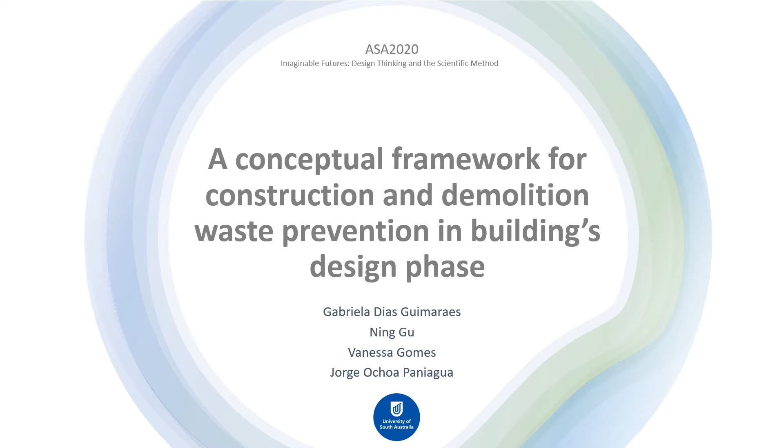I'm a PhD student at the University of South Australia, and I'm going to be presenting to you my paper entitled A Conceptual Framework for Construction and Demolition Waste Prevention in Buildings Design Phase.

When it comes to sustainability in the building sector, beyond the GHG emissions and energy use, waste started to gain global attention, especially since without any consideration, this type of waste can have a significant impact on both the economy and environment, and can represent almost 40% of a country's total waste. So the effects of construction and demolition waste are definitely noteworthy, and the need for a proper management strategy becomes clear.

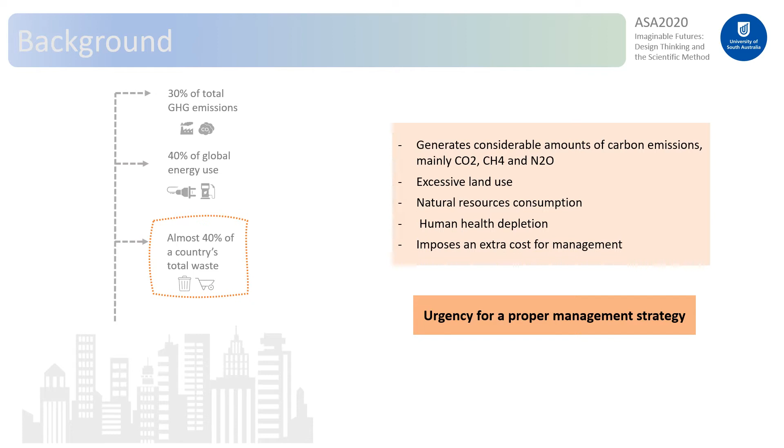The environmental evaluation of processes related to construction and demolition waste can be analyzed through the waste hierarchy triangle, basically a tool that indicates preferable solutions to reduce and manage solid waste. As shown in the diagram, the concept of avoiding waste is preferable, since it offers preventive measures. Particularly for buildings, the best way to apply this perception is during the design phase, where there is a higher chance of optimizing project alternatives for waste efficiency.

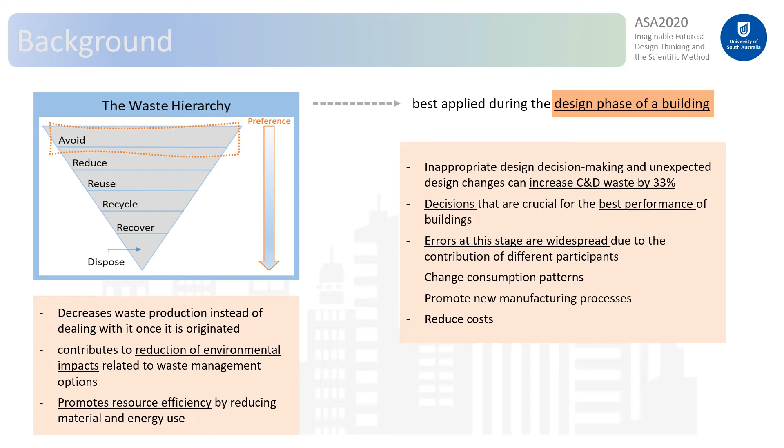With that in mind, waste prevention needs to consider impact from a life cycle approach, so that waste streams are comprehensively analyzed and accurately dealt with during the design phase. It also calls for a focus on human factors, as its attitude, reality, context, and necessities will orientate this development. In addition to that, the amount of data and the requirement of computational integration expect the combination of technological base as well.

Therefore, the combination of BIM and LCA is seen in the literature as an important step towards waste minimization during the early stages of a building, because of one's potential to store and manage essential information and share it with multiple stakeholders, and the other's holistic environmental assessment.

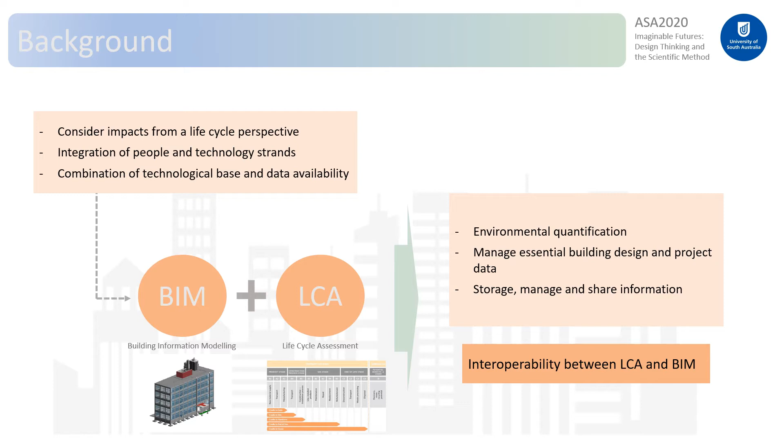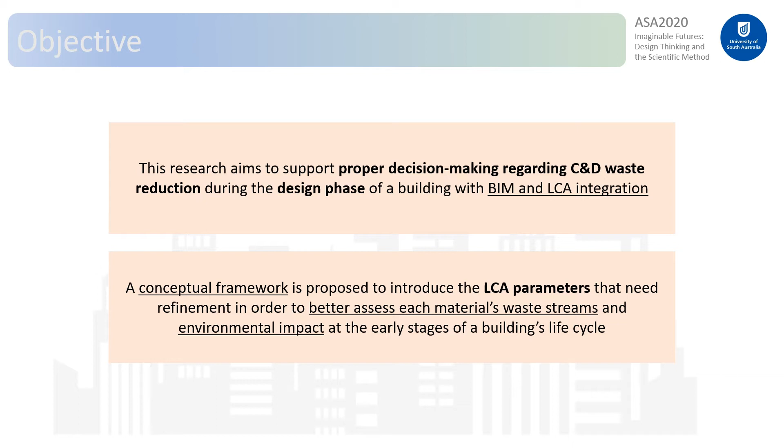But although currently widespread as a suitable approach, the interoperability between BIM and LCA still faces many challenges from both a technical and informational view. For this reason, this paper aims to support proper decision-making regarding construction and demolition waste during the design phase of a building. A conceptual framework is proposed to introduce the LCA parameters that need refinement in order to better assess each material's waste stream and environmental impact at the early stages of a building's life cycle.

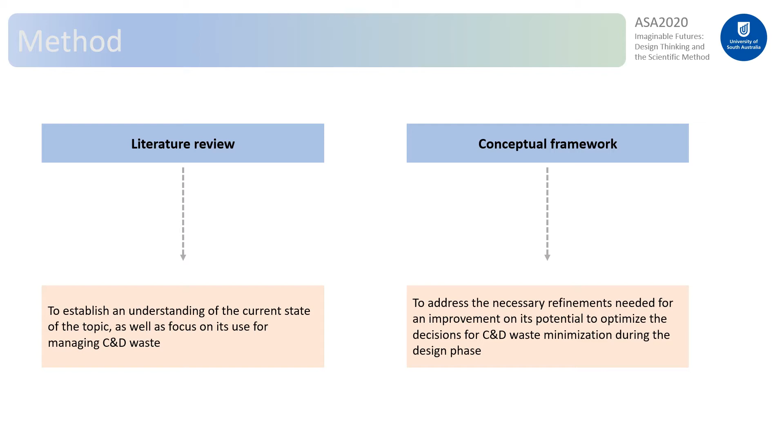To do so, a literature search on review papers discussing BIM and LCA integration has been carried out, and afterwards, a conceptual framework was introduced to address the necessary refinements needed for a construction and demolition waste management.

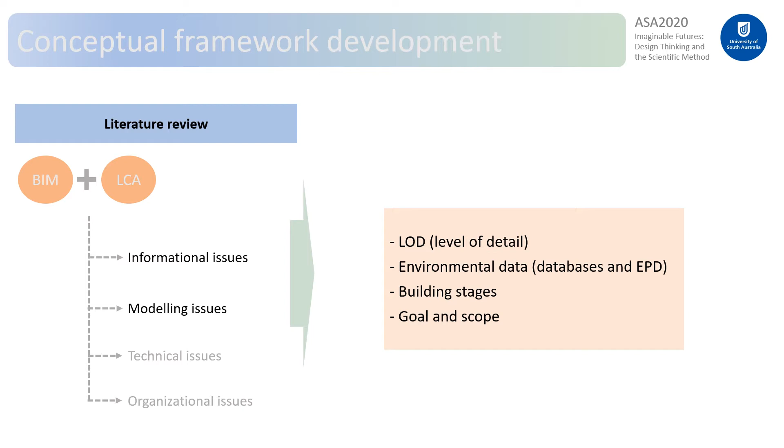After a comprehensive review of the papers, the overall challenges of BIM and LCA integration were better identified through different viewpoints, mainly divided in informational, modeling, technical, and organizational issues. Technical and organizational issues, although crucial for the proper integration and automation of the link between BIM and LCA, are not the focus of this paper, which targets the information management and modeling refinement. The biggest information and modeling issues are related to level of detail, environmental data, building stages, and goal and scope. Or better yet, the absence of this information in current assessments.

The appropriate LOD must be taken into account, as it will define the amount and quality of data that will be provided to the lifecycle inventory. Beyond that, it can actually help the calculation of end-of-life impact, as a higher LOD gives precise information on materials that can be divided in waste typology, which is important to formulate precise waste streams.

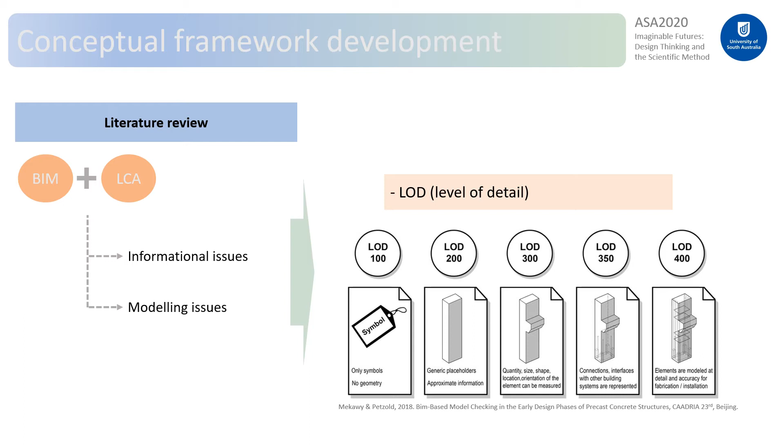Environmental data from building materials or elements to develop an inventory are also necessary and will be provided by databases and environmental product declarations, EPDs. There are several databases currently available. The challenge is that most times the amount of information regarding environmental impact stored on them is not enough. Most regions do not even have fully refined databases, and the use of generic ones hinders the assessment of realistic environmental impacts.

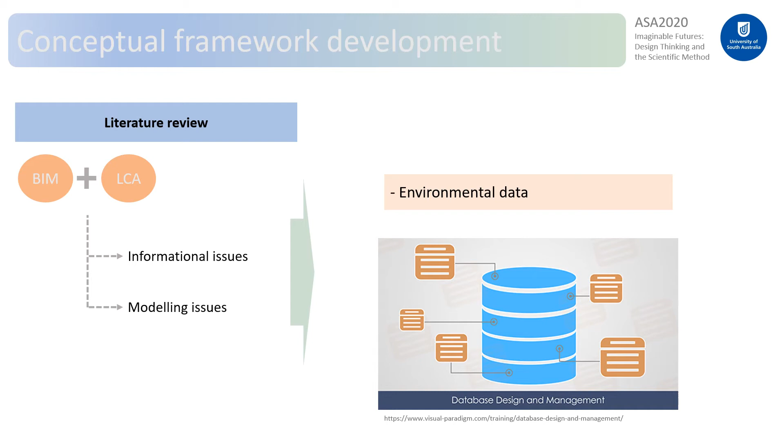Even when there is data based on a broader life cycle that calculates processes up to the end of life, it's usually based on generic information or even a generalization of common scenarios, such as landfill disposal. As a result, construction and demolition waste is not properly accounted for on the overall building impact, and is not even considered during the decision-making process at the design phase.

Regarding building stages, a building LCA is divided in 4 main stages. We have the product, construction, use, and end of life.

And also additional information on potential benefits and loads if necessary. Theoretically, the choice of stages will be based on the goal and scope of the analysis, but in reality, it is critically linked to the availability of information.

It is clear that there is a tendency to focus on the product phase, which can be explained by the temporal facilitation of it. During the design of a building, most of the product phase already happened, so the data is available and fairly precise. After the construction phase, limitations based on scenarios and assumptions start to arrive. This means that the development of a proper cradle-to-grave BIM-based environmental assessment is still scarce.

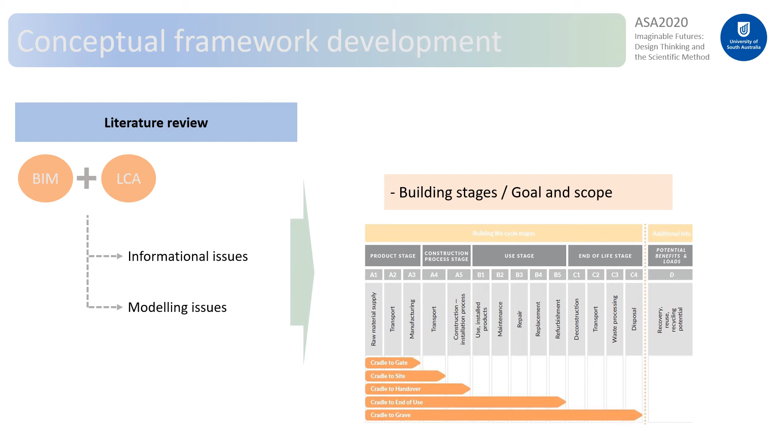With all that said, it is interesting to see that beyond the integrational issues, there are critical matters regarding information and modeling inside the LCA that need to be addressed and are currently under study. During the design phase, if the user has access to the BIM model and LCA results, regardless of how the integration is done, the data from the lifecycle calculation needs to be accurate to properly help the decision-making process.

However, there are several parameters that are commonly based on assumptions or generic data, if defined at all, since although waste is generated during different stages of a building's life cycle, only 27% of BIM-based LCA studies consider construction and demolition waste production.

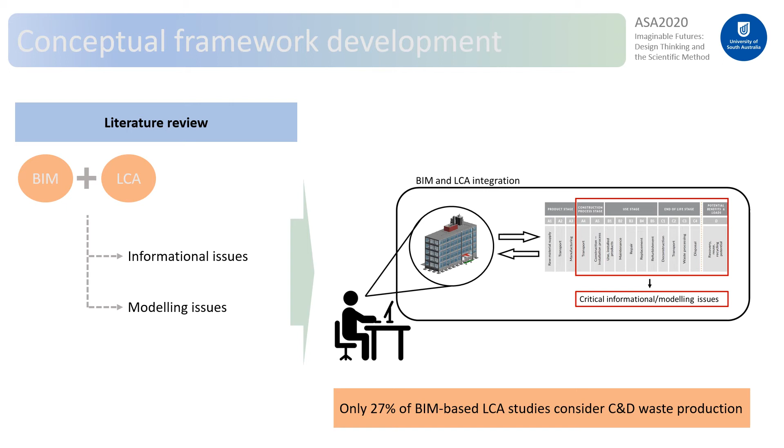So a conceptual framework is proposed as a first step to guide the refinement of modeling processes and improve the materials waste streams. This framework shows the parameters required to develop a comprehensive LCA based on the sources and factors of waste during a building's life cycle. It also indicates the level of difficulty for obtaining these parameters.

During the construction phase, causes of construction and demolition waste are linked to the transportation and construction or installation processes. Actions such as damaging goods during transportation, difficulties for delivering vehicles, insufficient protection during unloading, offcuts, application processes are potential drivers. Hence, a wastage percentage per building material is required to account for the necessary over-manufacturing.

The use phase, specifically the stages of maintenance, repair, replacement, require data on each building material replacement factor based on the lifespan of the studied material. Due to the long building lifespan, the end-of-life phase and the potential benefits and loads have the highest assumption rates, as well as non-accountability in papers.

The deconstruction stage requires knowledge on the type of demolition in order to enable calculations on energy, water, and diesel consumptions. The transport to disposal firstly needs the end-of-life scenarios of the building materials. The waste processing stage will take into account the chosen end-of-life scenario of each building material as well.

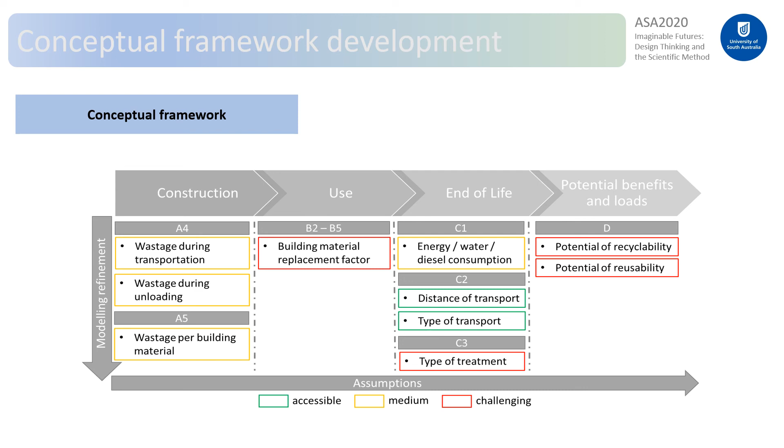The development of methods to properly combine BIM and LCA is growing, especially in terms of design flow, as well as the attempts to classify and standardize its integration. However, beyond the technical integrational issues, there are critical matters regarding information and modeling before this integration takes place.

In conclusion, to properly inform the designer of the environmental impact of each material, the building's LCA needs refining. There are already some easily attainable data, such as transportation, which are still not included in the evaluation simply because they're part of the end-of-life phase. Some parameters are dependent on construction technology and user behavior, such as wastage during construction and demolition consumption.

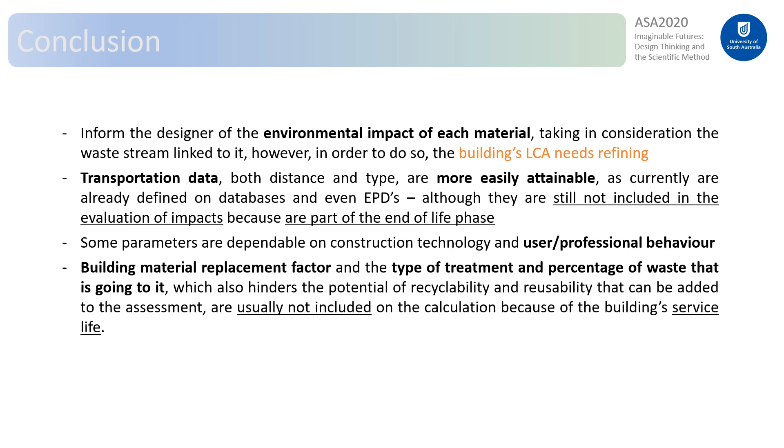And finally, some points are defined as challenging. Building material replacement factor, for example, that nowadays is not standardized between materials and is commonly used as a generic average for all building components. Or the type of treatment and percentage of waste that is going to it, which also hinders the potential of recyclability and reusability that can be added to the assessment and are usually not included in the calculation because of the building's service life.

This research is part of an ongoing project to develop a computational platform for reducing construction and demolition waste during the design phase with the use of BIM and LCA. Next steps will be the refinement of each parameter with the use of statistical estimation and uncertainty analysis, so that the LCA can deliver a more reliable environmental impact result.

These are some of the references used in this research. For a complete list, you just need to access the whole paper.